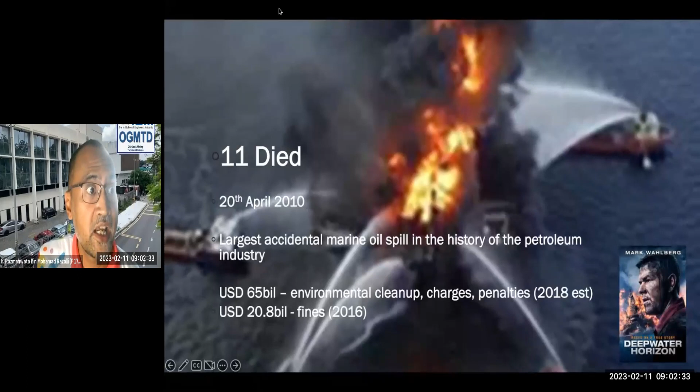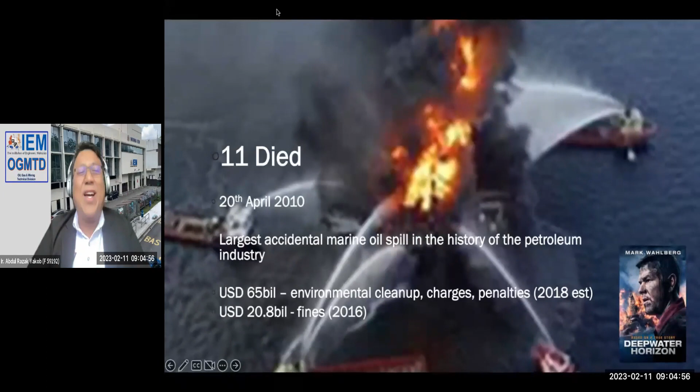The topic that we have today, what you are seeing, I will not be showing videos. I hope I myself can entertain you for the next 2 hours, so we will not be seeing videos. But what you're seeing over here is a visual of what happened at the Macondo field in Deepwater Horizon in the Gulf of Mexico.

11 people died over here, and it happened on the 20th of April 2010. It is considered the largest accidental marine oil spill in the history of the petroleum industry. And up to now, 65 billion US dollars in environmental cleanup charges and penalties has been paid, as well as 20.8 billion in fines. So it's a large amount of money, and compared to the 1MDB scandal, this one is probably much, much bigger in terms of the volume involved.

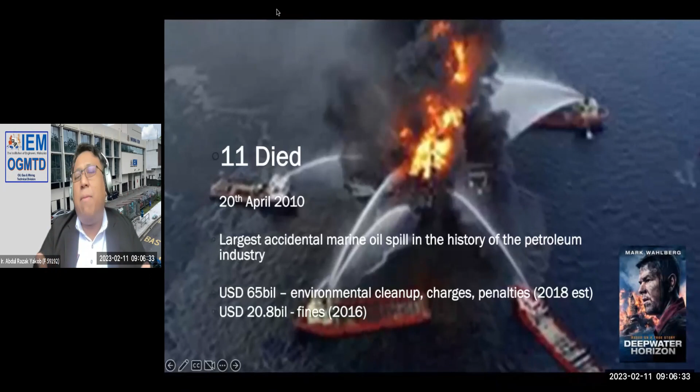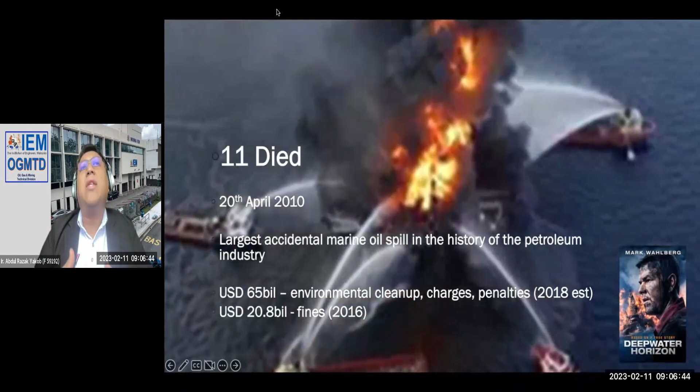You can go ahead and Google this Macondo field or Deepwater Horizon incident. You can watch the movie as well about this happening. But 11 people died. So the topic I'm going to talk about today is basically because of this. Whenever you are not able to plug the well properly, either to suspend it, which is in this case, or to permanently abandon it, then this will happen.

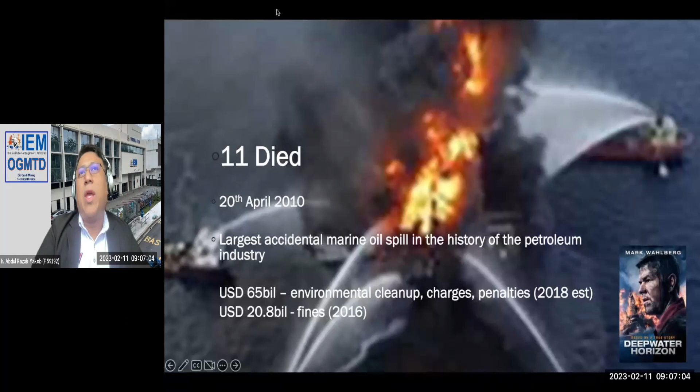That's the reason why this is the first visual that I put in, so that all of you realize and appreciate the seriousness of the topic that we'll be talking about today. Yeah, so let's take a look at it.

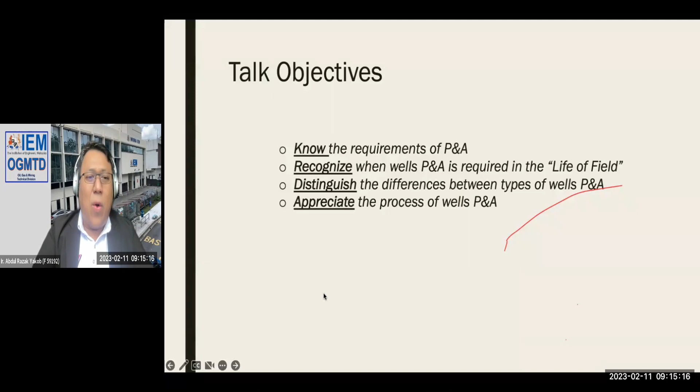Okay, on with the talk. So

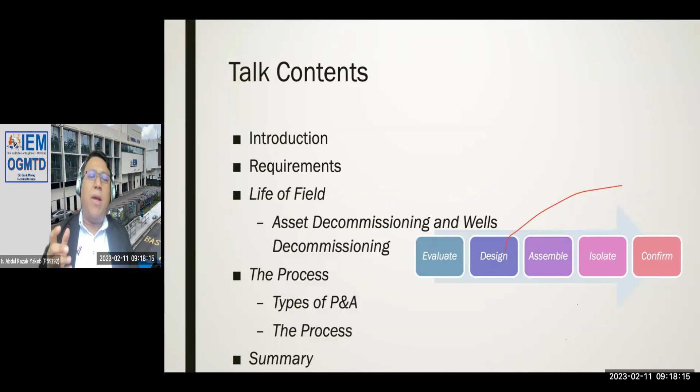So the process is: evaluate, design, assemble, isolate, and confirm. Remember, at the end, always confirm, because if you don't confirm, that's the reason why the Deepwater Horizon Macondo field disaster actually happened, because it was not confirmed.

But whenever we talk about an incident, whenever you go into HSE, when an accident happens, it's not just one mistake. In the chain of work that you do, there are always many instances where errors occur to contribute to that disaster.

If you would like to know more about Macondo, Deepwater Horizon, first I would say go and watch the movie. Secondly, there's a lot of Wikipedia information that you can get about the Deepwater Horizon disaster.

All right, and then the summary, we will talk about that.

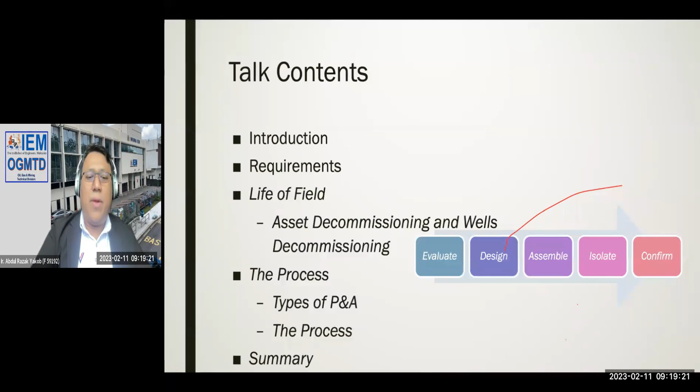And this is the introduction of me. If you do not know me, I used to be the OGMTD chairman, now it's engineer Li Chang Kwan. So if you would like to join and contribute to the OGMTD, you are most welcome to join in the meeting, to become an observer, or even to come over and say hi to the committee.

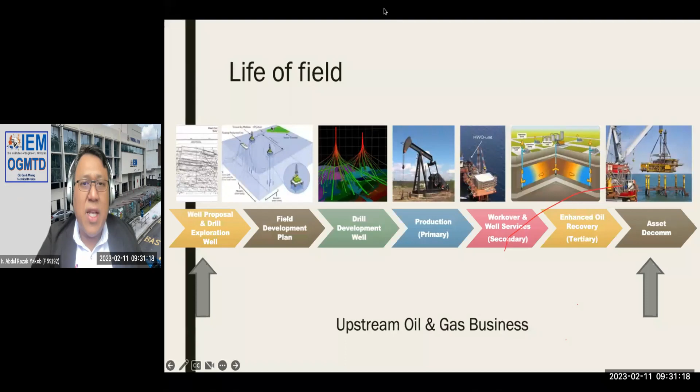So you will also have downstream, about things like that. So let's move on.

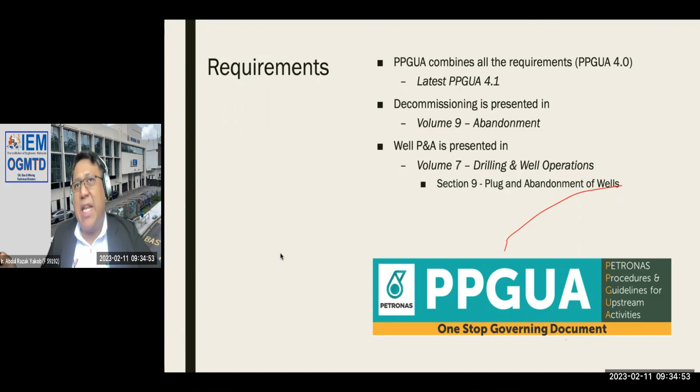So why is that? If we talk about the abandonment of the facilities, you take out all of the structure, the plant, whatsoever - that is covered in volume 9. However, when we talk about wells abandonment, you will have to go back into how the wells abandonment is done over in volume 7.

So that's the reason why whenever you go into volume 7, section 9, you will see plug and abandonment of wells, where it actually has the requirements, the regulations specific to the plug and abandonment of the wells. Now you see how serious the topic is, how important it is in the oil and gas industry, because you want to make sure this is done properly.

If this is not done properly, that's when you will have all of the disaster - not only people that die, but also the environment that got impacted. And it is actually very, very costly.

All right, so when we talk about abandonment definition, the legal term of decommissioning, you can find this in the petroleum arrangement contract. When we talk about working with Petronas, all of the contractors, all the operators from ExxonMobil, BP, or PTTEP, or any other people that comes over to Malaysia to operate, we will have a petroleum arrangement contract.

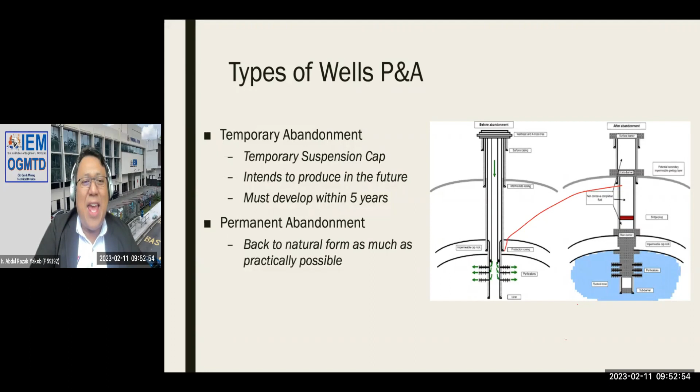So I will pick and choose a certain project which has real benefits to me, some new things for me, the challenge that they have inside there gets me going with that project. Sometimes this can be really challenging.

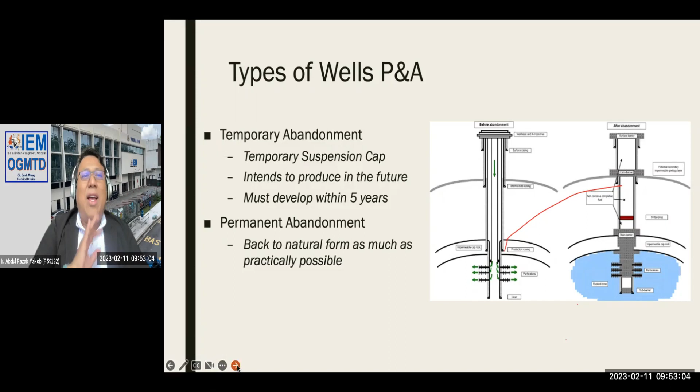So anyway, when do we abandon wells? When the exploration well objective is completed and was found to be dry. So what does it mean by dry? Whenever you do an exploration well, you drill, and then you test it down there.

Oh, that's only water. How about those things where the reservoir engineers say they got some hydrocarbon inside there? Oh, they didn't read it nicely, it's actually just water. Okay, so it's water, or if you have oil over there, but very very little oil, only trace, cannot use it anymore. So all you have to do is go and plug and abandon that particular well.

When a development well has reached the point of becoming uneconomical to produce - so when the well was basically producing, and then after like 30, 40, 50, sometimes 60 years, it becomes uneconomical anymore - you need to plug and abandon before you chop off that particular platform to put it somewhere else.

Other than that, of course, whenever you drill, you encounter hole problems. When you talk about hole problems, just imagine you drill down here - we are not talking about like 100, 200 meters, we are talking about like 2,000 meters over here, 2 kilometers. So if you run 2 kilometers, that's very, very far, isn't it? That's how far we have to drill inside the hole.

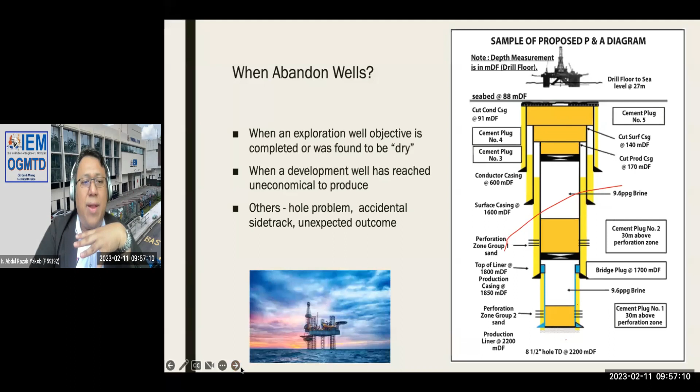But what happens over here, if say for example you have a hole problem, you will need to secure that particular well. All right. So, why the need for a proper plug and abandonment?

Okay, so whenever you are working on a well, whatever you want to drill, you drill, then put casing, cement, drill, casing, cement. That's the reason why you have this tapered shape, yeah.

So you always have this blowout preventer. What the blowout preventer does is, if there's any surge down here - and by surge I mean pressure - whenever that pressure comes, it comes together with the hydrocarbon or whatever fluids you have inside there. So it pushes all the way up here, and we're talking about down here can be like a normal well about 3,000 psi. That's quite a lot. So whenever that shoots up here, it basically will be quite disastrous. And some high pressure, high temperature wells, HPHT wells, if you've heard about it, can go up to 10,000, 15,000 psi. That's the reason why we have this blowout preventer, BOP, to make sure you're secure.

So whenever, as I mentioned to you just now, hydrostatic pressure - you always have something inside here with a density that is higher than the pressure that you have down here. How do we do that? Of course, that is another topic of talk that you can attend later.

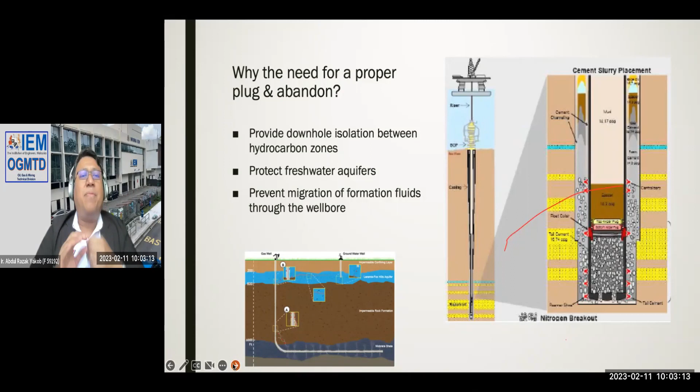So we go into the process of abandonment. First, as I mentioned to you: evaluate, design, assemble, isolate, confirm.

Evaluate - we want to evaluate the facilities. So if the facilities, Razak, come and help us to plug and abandon this well. How do I know this is a wellhead platform? Because you have conductors down here, and that is where the production comes in. So right now, please come and abandon this. Hello, how do I want to come and abandon when your platform is like this? You fix the platform first, only then you call me, yeah?

So facilities, you need to make sure that the facilities is there. Of course, you check just now, the regulation - all the list of regulation: international regulation, national regulation, state enactments, as well as the industry regulation.

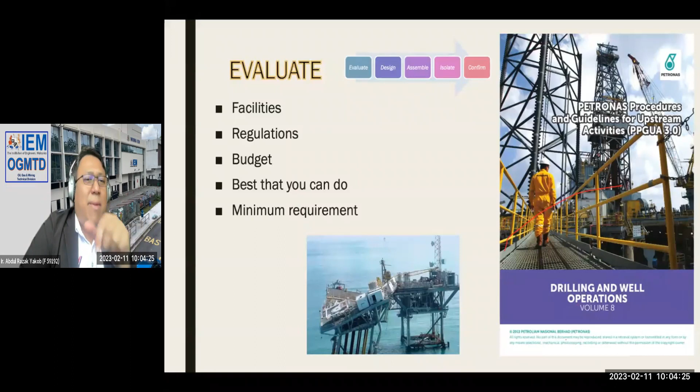And the budget - got money or not? Got no money, don't need to do that. But budget is really important, because without the budget, it is very hard for us to move. Because if I have to manage the project, in order for me to bring the equipment, I need to pay the people. And we are talking about managing about 20 contractors out there. So if I call them for the equipment and I don't have money to pay them, then how do I want to do the project? So budget must be good, budget cannot be little.

Budget - if you want to do this, we can always take a look at the design. What exactly do you need to meet, because each one of the wells, I can say, is very unique on its own. Sometimes it's a design issue - if you have a different design in terms of the casing sizes and all the different equipment, I need to go in and put it inside the hole in order to pull out the casing. And if the design of the casing last time wasn't really that good, so the casing is all corroded, then I will need to fix that problem first. And if the cement job that was done was really bad, then I need to remedy that problem first. So it depends on the uniqueness of the wells that you have over there.

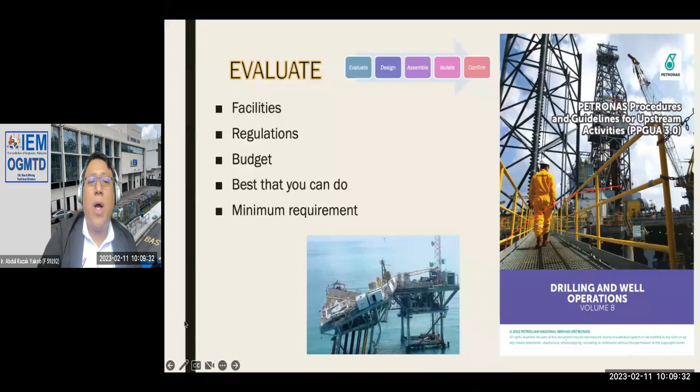Sometimes it makes it a bit relaxed, sometimes it makes it more stringent, so you need to know what the requirements are. Then the second item is to design. Whenever you want to design, you want to take a look at the availability of the equipment and resources in the local market.

So whenever I choose an accommodation barge to bring in all the people or some of the rigs that will do the work, I need to make sure what is there locally. Why would I want to mobilize equipment that is over in Dubai or in the US that will cost me millions and millions of dollars to actually bring into the region? So you need to make sure what is available in the local market.

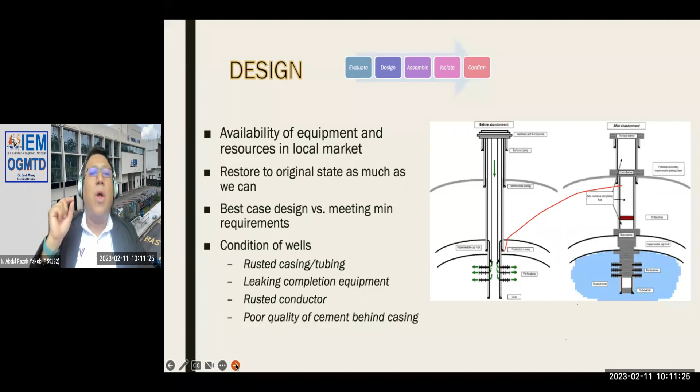And you hear this again and again: we would like to restore whatever that we have done. Say, for example, 30 years before, I have gone over there and produced all of the production whatsoever. But it is my responsibility to go back there and restore it to the original state as much as possible. So that is our responsibility.

Best case design versus meeting requirements — that's again when you are designing, you have that option. So what we coin now is called fit for purpose. Fit for purpose is like you create a design which is for that particular work.

Usually standardization will not work here because each well is unique. Although the well is the same design as when it was drilled 30 years ago, right now the condition of both wells will not be the same. The condition of the wells, as I mentioned, includes rusted casing, tubing, leaking completion equipment, and poor quality cement.

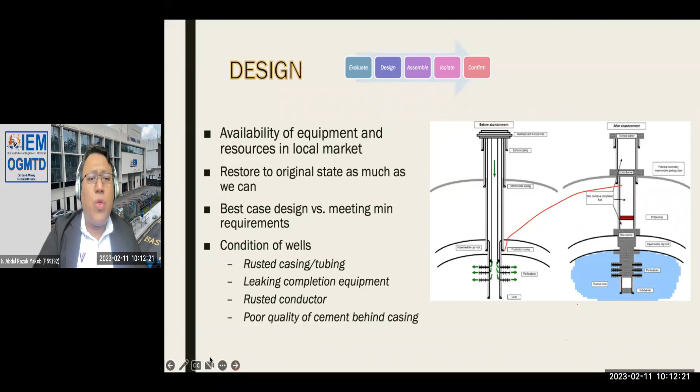And then the third step is assemble — you want to put together equipment and resources: the rig, supporting marine equipment, the cutters, how do you want to cut?

Because you cannot leave all of the casing down there. Remember whenever you drill, you have all the casing, and you want to pull it out. How do you pull out that casing? Of course, you need to cut whichever part of the casing that is not cemented — cemented parts, you cannot do anything about. And then there are the cement plugs that you need to set, the cement you want to use, and other services.

So that's the reason why you have to deal with 20 contractors. And just imagine this — 20 contractors will look at you asking, 'Razak, when are you going to pay?' It's always like that. So scheduling matters.

Schedule — Malaysia has a monsoon season. So whenever you want to put in a project that does not bring money to you, like this, scheduling is critical.

So weather, and also facilities — sometimes when you want to go into that particular facility's platform, that platform is still producing and you cannot shut it down. Whenever you want to go in, you need to shut down the operation. So we need to have this timing with facilities decommissioning. Some places, people are trying to decommission, and you need to work together with them. So scheduling is very, very important.

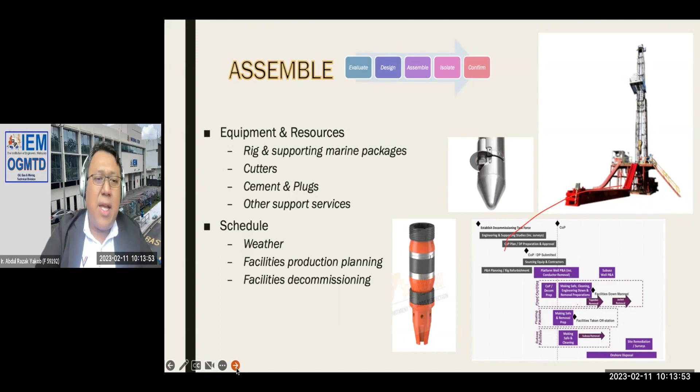So you have heard: evaluate, design, assemble. Let's take a look quickly at isolate. Isolate here means to prevent flow for a long period of time.

What does it mean by for a long period of time? Of course, we want it to be forever. However, forever will not be possible. Sometimes you design it such that it will be as long as possible, but again, because of the difference in terms of the movement of the earth, cement can get cracked and whatnot. Bridge plugs over here can get ruined because down there you have like 150 degrees Celsius and pressure that is like 3000 psi.

What do you think will happen to all of this equipment? Of course, it will get ruined. So that's why we have all of this problem.

So no communication between formations. I stress so many times, whenever you have perforation over here, you do not want it to communicate. Say for example, cement over here, if the cement is not good, then it can communicate. And bubbles will come out because all of this is pressure, 3000 pressure. Of course, if you have that pressure down, it will go up. So that's the reason why you do not want communication between formations.

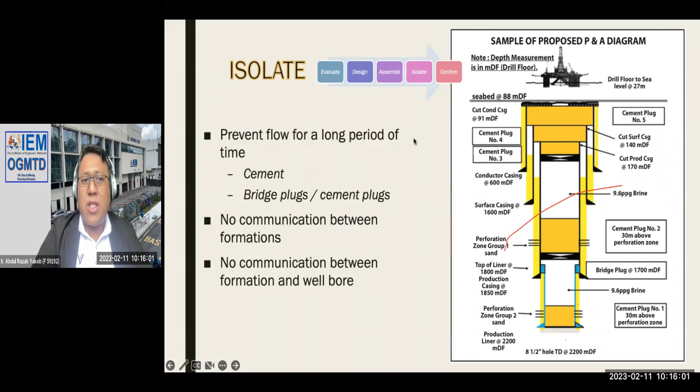All right, isolate, and of course confirm. You make sure that you are able to confirm the isolation is intact. How do you want to do that? The best thing you can do is pressurize that particular hole to make sure there is no return. For example, if you pressurize over here and you see some bubbles, that means you didn't do a good job over here, you didn't do a good job over there. So you make sure. That's the reason why we want to confirm.

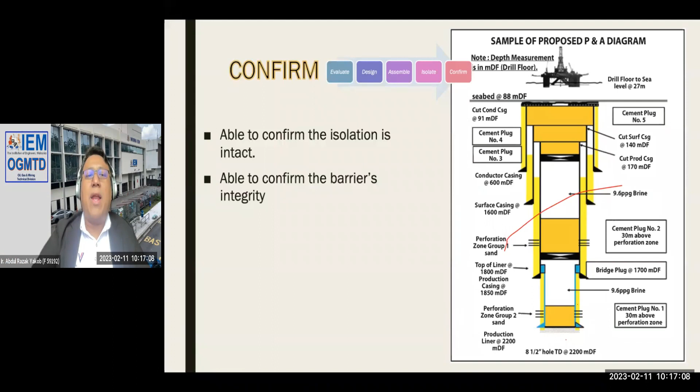And of course, the process: evaluate, design, assemble, isolate, and confirm. 5 items. You want to make sure that you do that whenever you plug and abandon a well.

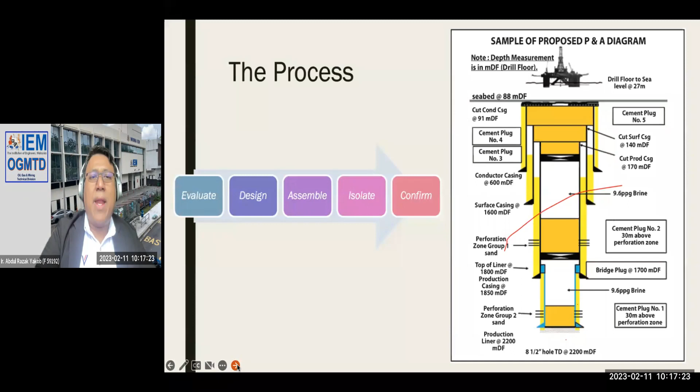So, summary over here. I hope Engineer Wata is happy that I finish up early. So, in time, yeah, give me just a bit more, yeah, Wata.

So, summary over here. Wells plug and abandonment required during exploration - that is to answer the question of when do you want to do the wells plug and abandonment, and what types of wells plug and abandonment are there. Those are the 2 items: temporary as well as permanent.

Temporary, you want to do that during exploration wells, or sometimes when you want to produce it in the future. But there's always a limitation - remember, limitation 5 years. If you don't develop that particular well, you don't produce from it, you want to go back over there to abandon it permanently. So it's not an easy thing to do. That's the reason why you need to think ahead, like a few years down the line. What do we want to do with this?

So this question is asked even before I go and drill the particular well, because before I drill the well, I will ask the reservoir engineer, what exactly is your plan? Do you want to, if you find oil over here, what do you plan to do? Are you going to produce it? If you want to produce it, then do you have the facilities ready and going over there within the 5 years? So I will need to ask all of these questions to the project team to make sure they know what they are going into.

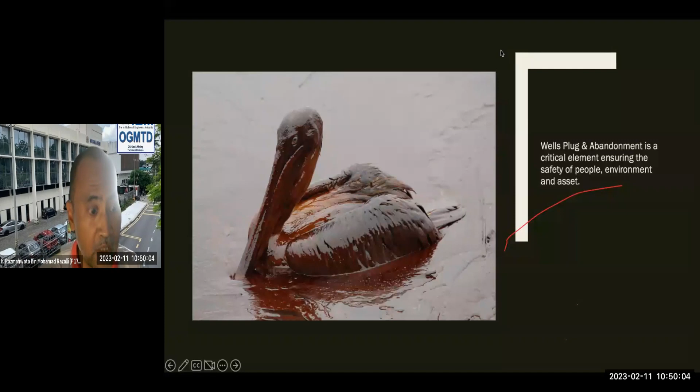I did not have anything else, and there were no further topics in the chat, so with that I would like to close out this session. Again, thank you, Engineer Razak, for presenting an enlightening, engaging, and very high energy presentation. Thank you all for attending, and the Secretariat for making sure Engineer Razak can spread his gospel of drilling to the world and continue his role of taking over the world.